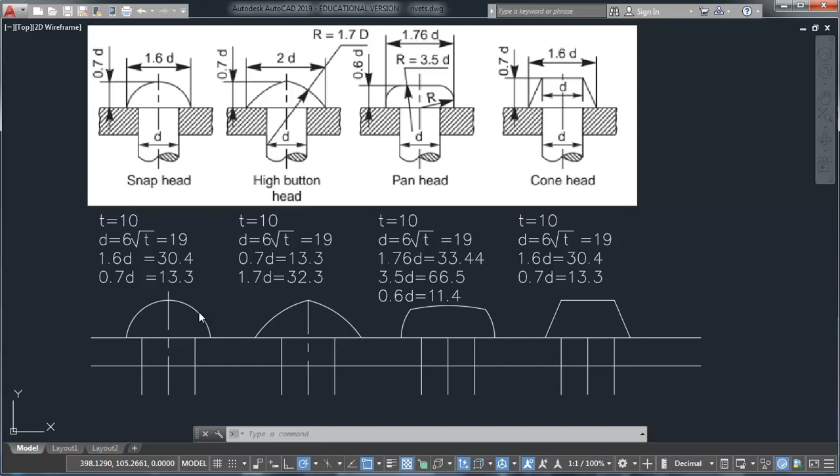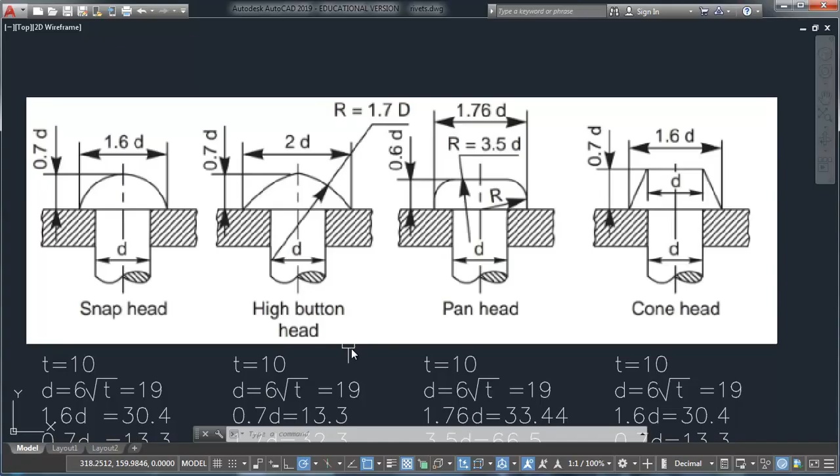Okay guys, as I had promised, in this video I'll be explaining how to draw the different rivet heads. You've already seen these four types of rivet heads. All the measurements have been given in terms of the diameter d, which is the diameter of the hole that needs to be drilled in the two plates which are to be joined by riveting. A rivet is going to be inserted and the different heads implemented. Here you can see four of these heads, and below we have four more, so in all we have to learn about eight different rivet types.

Before going further, I'll tell you about the formula. Only the thickness of the plate will be provided in the exams, and you have to calculate the diameter of the rivet needed for that plate. The formula is 6 under root t. When we do 6 under root t for this thickness, that is 10, we get 18.98 or so, rounded off to around 19 mm. So we'll be taking 19 mm as the diameter for all practical reasons here.

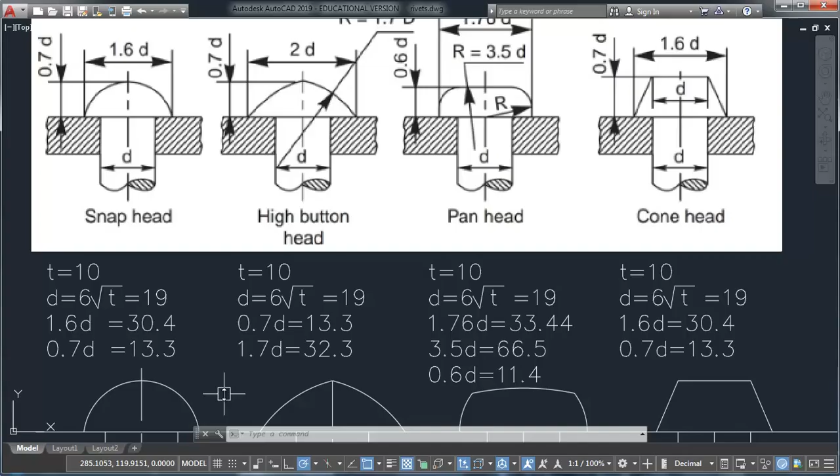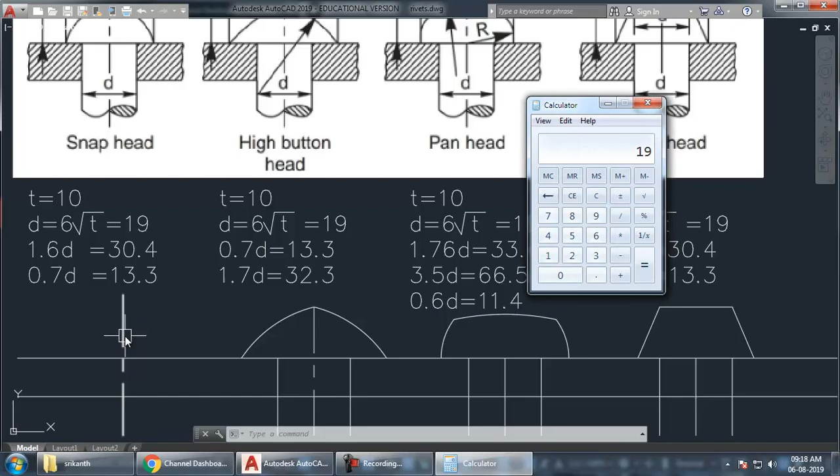Now when we start drawing this, first we take the axis, and from the axis the first thing we have to draw is the diameter d. So 19 mm is the diameter, and what we have to do is take half of that. Half of 19 is 9.5. So we'll be taking an offset center of 9.5 on both sides, and then we'll just trim these lengths off.

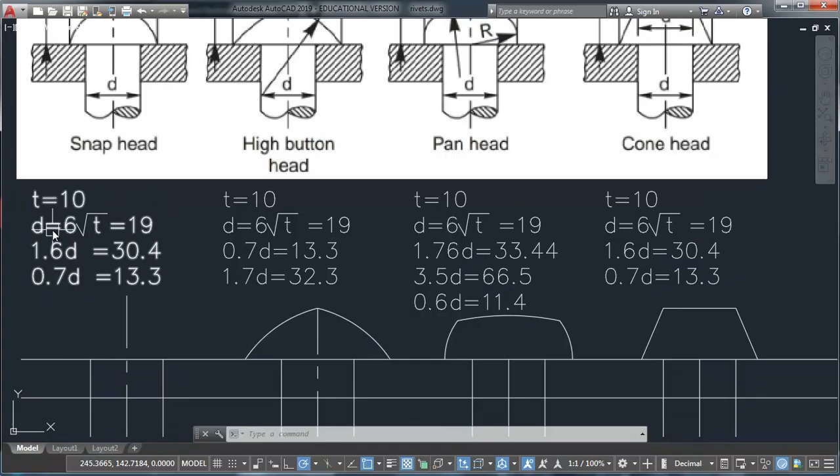Now we have to draw this dome. The diameter of the dome has been given as 1.6 times d. So whatever d we had, we multiply by 1.6 to get 30.4. So this is the diameter of the circle we need.

The next thing we need is the height of this dome. The height needs to be 0.7 times the diameter, which comes out to be 13.3. So I'll take an offset center of 13.3, which is this length, 0.7d. I'll take a line, then create a circle with the Circle command. Center I'll temporarily place here, and diameter I want to be 30.4, so I can choose diameter from here and give 30.4.

I can see that the dome is not exactly meeting this height, and we want the top point of this dome to be exactly here. So I'll take the Move command, M enter, select the circle, apply move, and move it down a little. You can see the center of this circle has shifted slightly downwards, so that's how we want it to be.

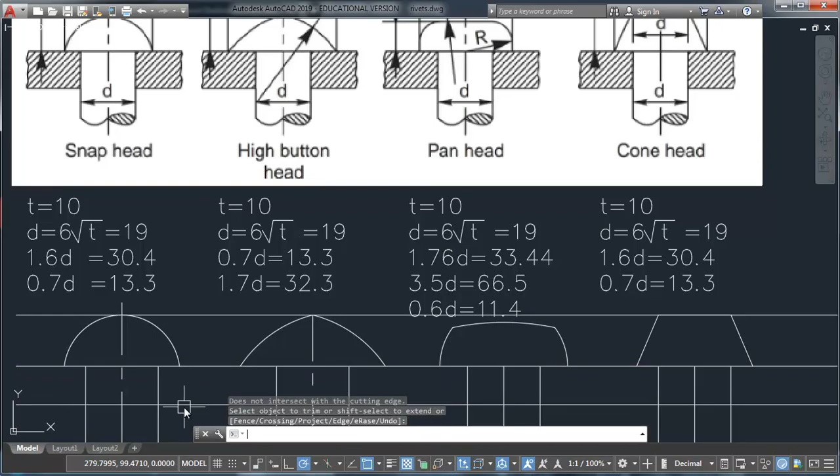Now what we have to do is trim away this lower part of the circle. I'll select this line, TR enter, and click once on this to remove it. The top line we don't need either, so I'll remove that as well. This has created the snap head type of rivet.

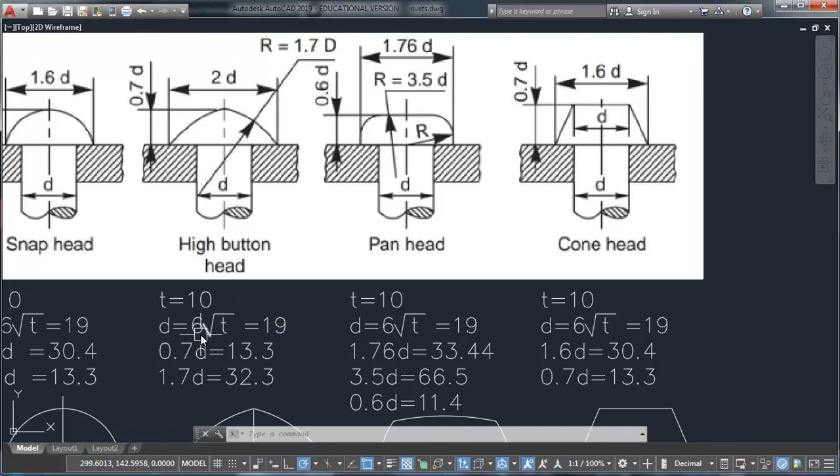Next, coming here, this one is slightly complicated, so we have to do some additional calculations. First, as usual, we calculate the diameter, 6 under root t, which comes out to be 19, same as previous, because the thickness here is the same as before. If the thickness changes, you have to calculate it accordingly. Coming to the height, 0.7 times d, again it's the same as before, 13.3. Here there's an additional radius given as 1.7 times the diameter, which comes out to be 32.3.

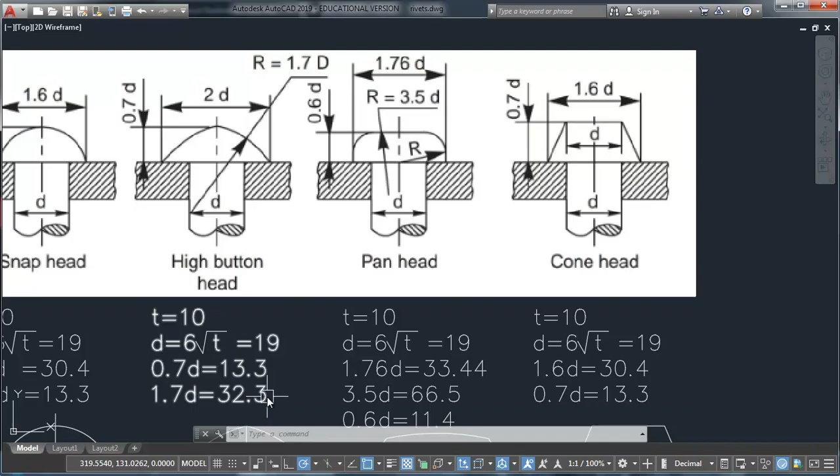So now to create this, I'll create the diameter as usual, and then take the height offset of 0.7 times d, that is 13.3. So I'll take an offset of 13.3 and create it. Now this is where I want the height to be, so I'll just extend this line to meet this particular line here.

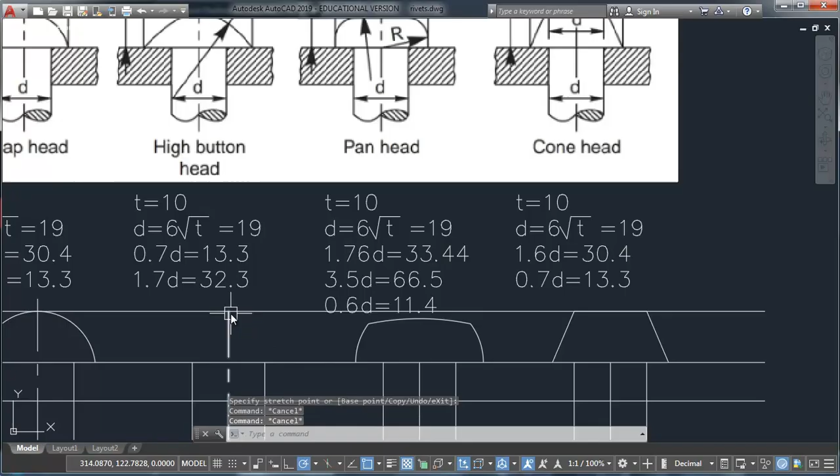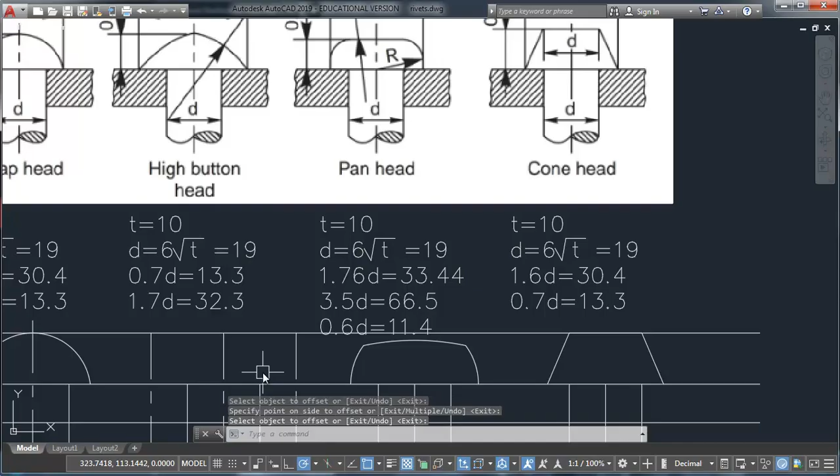Now I know the width of this bolt head as well, it's coming out to be 2 times the diameter. So diameter here is 19, so 2 times that will be 38. I'll take 19 on both sides, so technically I'll just get double of that. So offset of 19, and I'll take this on both sides. Now the intersection of this line and this line, this is where the intersection is lying.

Now we need an arc here with a starting point here, ending point over here, having a radius equal to 1.7 times diameter. So 1.7 times diameter is 32.3.

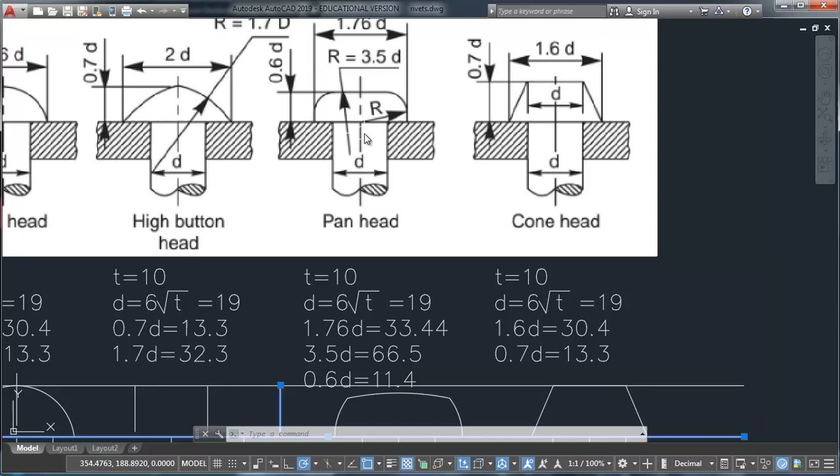So here we have to get back the menu. This particular option for arc is only available here under this menu. We have all the options here - we have to choose start, end, and radius.

Now we have to click on the start, which is here, end, which is here. You can see that we are not getting our arc in the desired direction. It just means we have chosen the wrong starting point - it needs to be here, ending point over there.

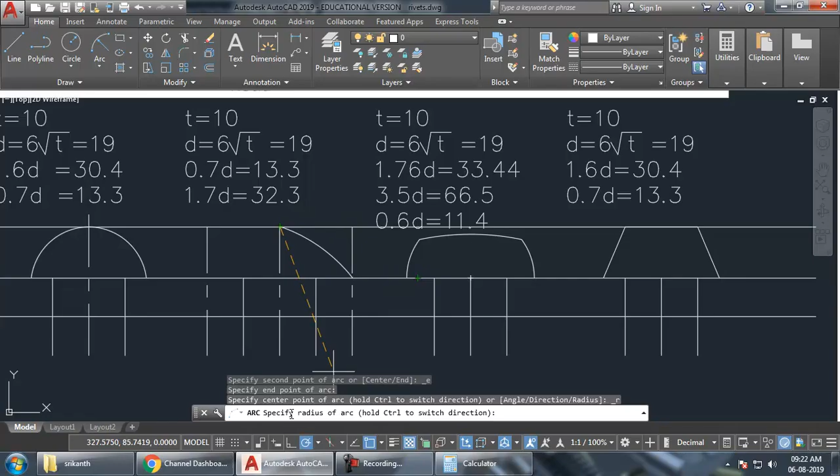I'll again take that same arc option, start, end, radius - starting point over here, ending point here - and now you can see the arc is going in the right direction. Now I can just feed the radius it's asking for: 1.7 times d, which is 32.3. Enter. So now I've got this.

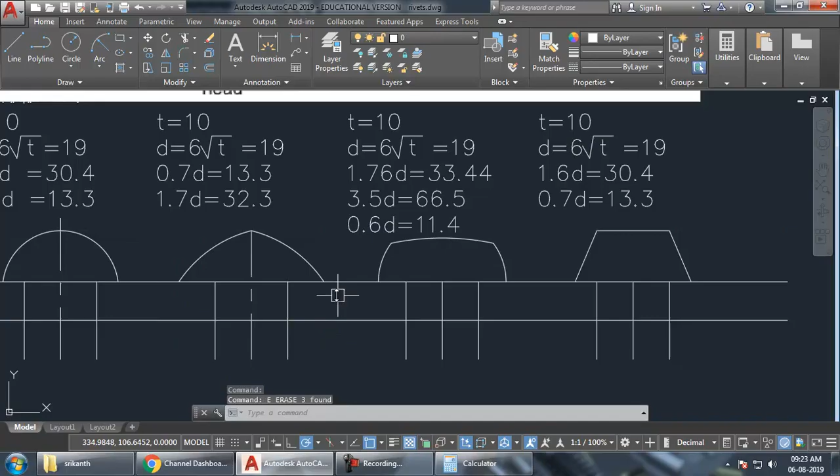So this is one side of the bolt. I can just mirror it using the MI shortcut. Select the object, press MI, enter, then click 2 points on the axis, press enter again, and remove all the things that are not needed. So this is how I create the bolt for high button head.

Coming onto the next one, it appears very simple. It seems, when we first look at it, this appears to be a fillet, but according to the given dimensions it is slightly more complicated. Let me show you how to draw that. Let me remove this - this is how it appears.

Now, once again, before proceeding, we'll have to do all the calculations, taking the thickness of the plate, to calculate all these ratios asked in the question. I'll first take down this 0.6D, which is 11.4. So offset 11.4.

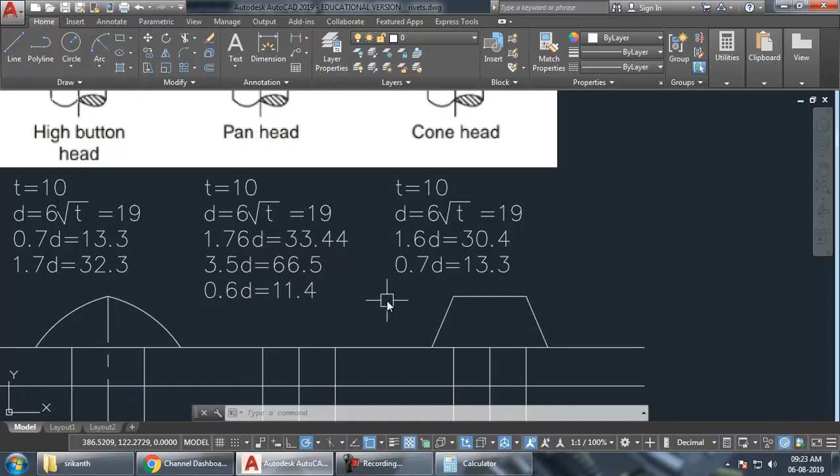After that I have to create this radius - that radius is 3.5 times the diameter. So I'll just create a circle randomly at some point, and I'll take its radius as 66.5. That is what we want.

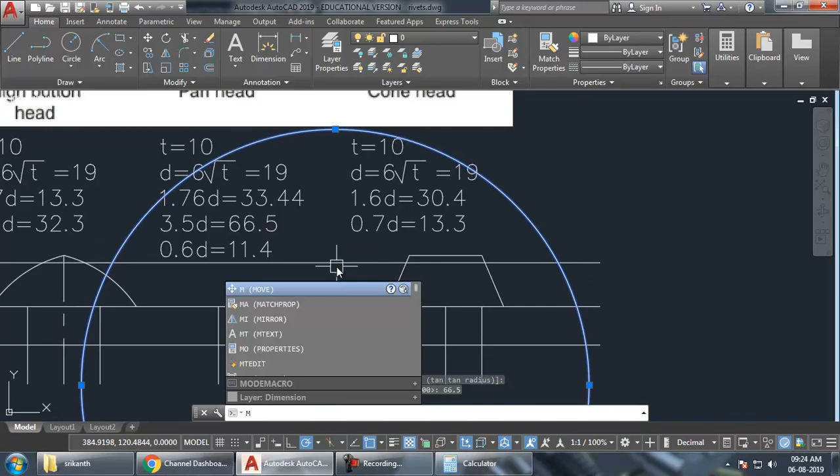Now I'll have to move it into this quadrant, moving exactly a straight line from here. So this is the top part of this dome. It's not actually a straight line, because here the radius has been given something, and then from the center we want this to have again an arc. This is again not a straight line - it's actually an arc, and we know this dimension 1.76 over here.

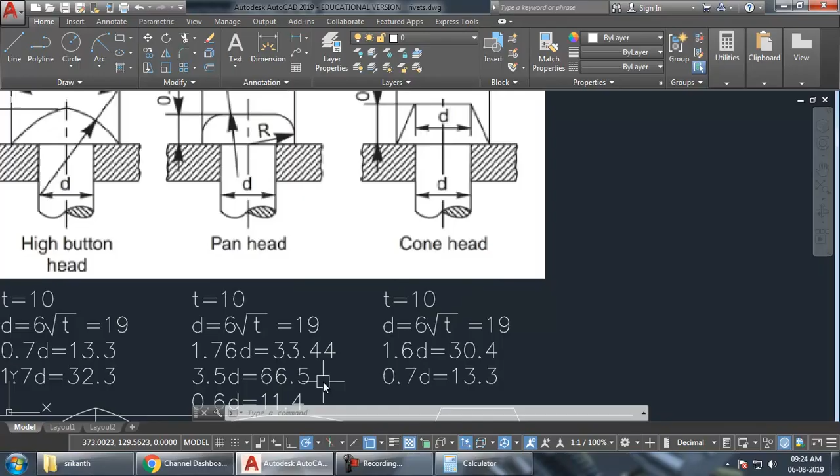So that's what we have to do. 1.76 times d is coming out as 33.44. I'll have to take an offset, half of this - 33.44, half of this is 16.72.

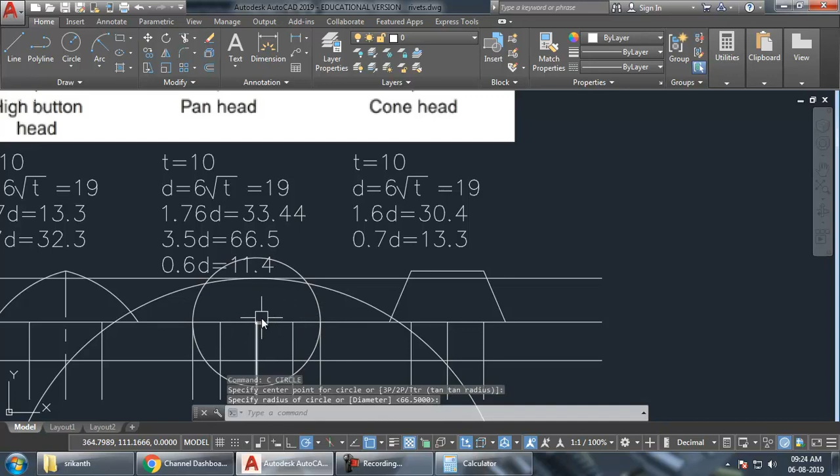So I'll have to take offset 16.72 from the center on both sides, and then I'll have to create a circle passing through this. So technically what I'm getting is, from this point I'm getting a radius to this circle as whatever is given here, r. Width I've calculated from this, and the arc radius has been taken from this point, that is the axis. Now I need to trim this off.

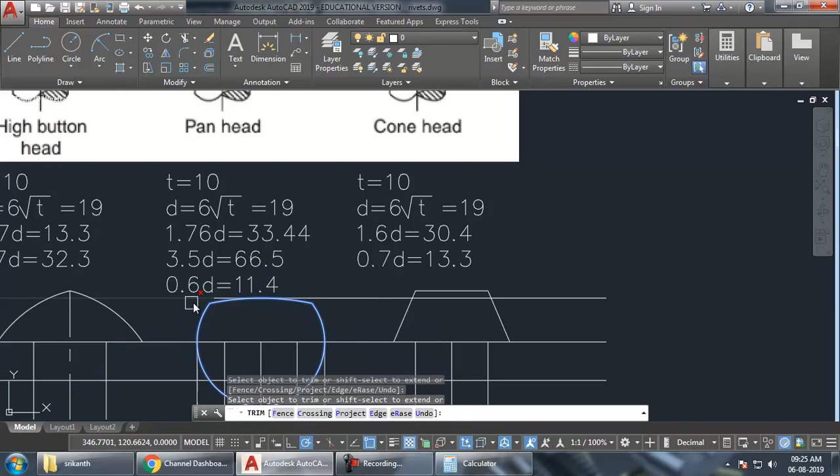I'll just select these two, TR, enter, and trim off whatever I don't need. This bottom part also needs trimming, so I'll select this, TR, enter, remove this, and remove all unnecessary lines. So this is how we get the pan head. You can see here that none of these edges are straight lines - they are all arcs of varying radii as given in this diagram.

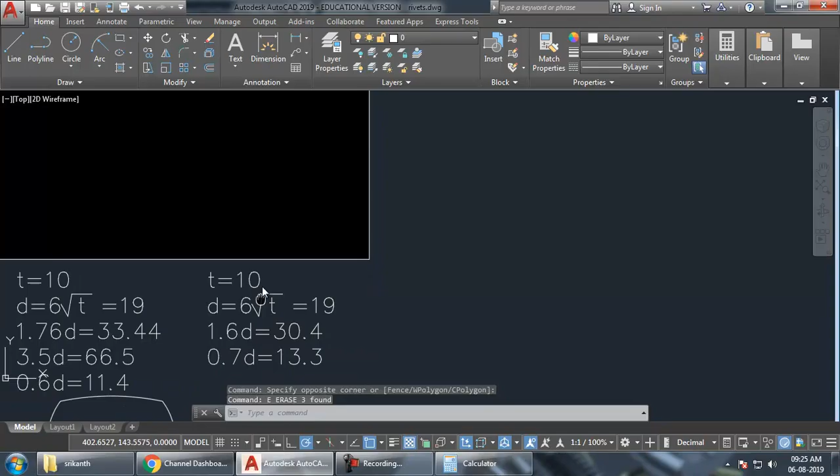The next one is cone head, which is very simple compared to all others. So what you have to do here is again calculate all the measurements. Taking the thickness T, I've calculated diameter 1.6D, required over here, and 0.7D, which is the height.

So I'll start out with the height 0.7D, offset 13.3. I'll have to take this height, and then I have 1.6 times D, which is coming out as 30.4.

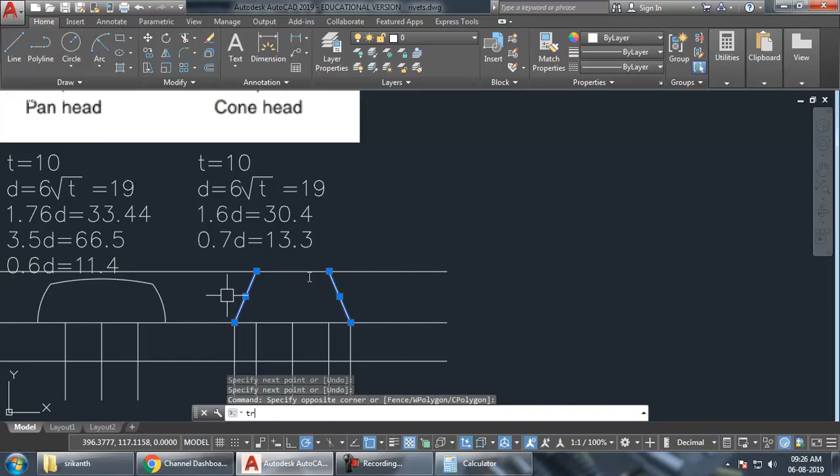Half of that I have to take as offset on both sides, 15.2 both sides, and I'll have to join this with the extension meeting over here. So you can just click the starting point here and hover your mouse over here for some time, and you will get the tracking of this extended line. Join it to the top, select both these lines, trim off unnecessary lines, and delete the bottom lines. So that's how we get this cone.